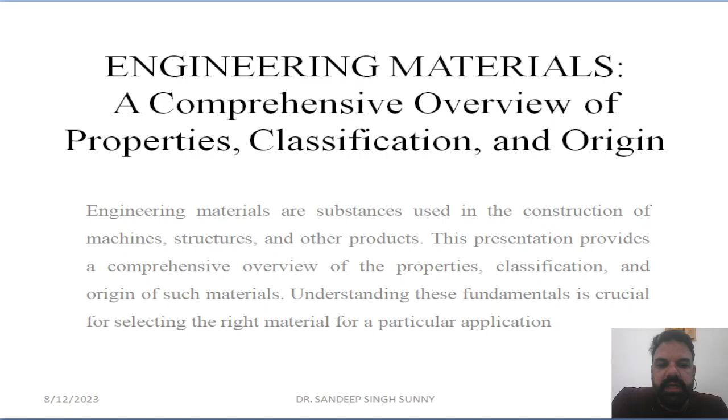So the presentation provides a comprehensive overview of the properties, classification, and origin of such materials. Understanding these fundamentals is very crucial, particularly for mechanical engineers, but I must say for all engineers, whosoever is related with industries or manufacturing, for the selection of the right material for a particular application. So here we have got the introduction.

The physical, mechanical, and chemical properties of engineering materials determine their suitability for different applications. It is obvious that if we know the physical, mechanical, or chemical properties of engineering materials, then only we will be more confident to apply that particular material in an appropriate way. So what are physical properties, mechanical properties, and chemical properties? We will discuss this in the further slides.

The first one is physical properties, which include density. Density, as we all know, is basically the mass per unit volume. Similarly, melting point and thermal conductivity. Such properties come under the section of physical properties of engineering materials.

Then we have got the mechanical properties, which include strength. We all know the strength aspect, as we typically have a dedicated subject related to this property, which is strength of materials in the field of mechanical engineering. The second property is toughness, and the third one, just for the sake of example, is hardness. Basically, hardness is nothing but the property of the material to resist penetration.

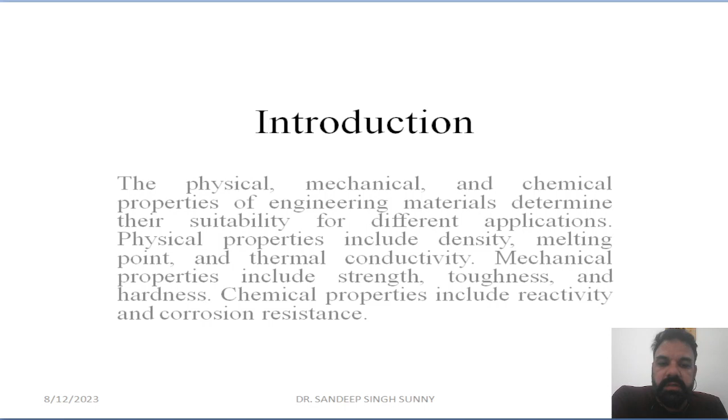So the other one is chemical property. Now the chemical properties may include reactivity, corrosion resistance, and such kind of things.

So in the next slide, what we can see here is the classification of engineering materials. The engineering materials can be classified into metals, polymers, ceramics, and composites.

Now, what are metals? We are already aware about it. Now, what are polymers? Polymers are nothing but the types of plastics. So in the third example, the third type classification may be ceramics.

We all are aware of these things. Ceramics are nothing but the tiles which we use in our domestic use, and it may be wash basins, it may be toilet seats. So all those things are basically manufactured from ceramics, and we do have composites as well.

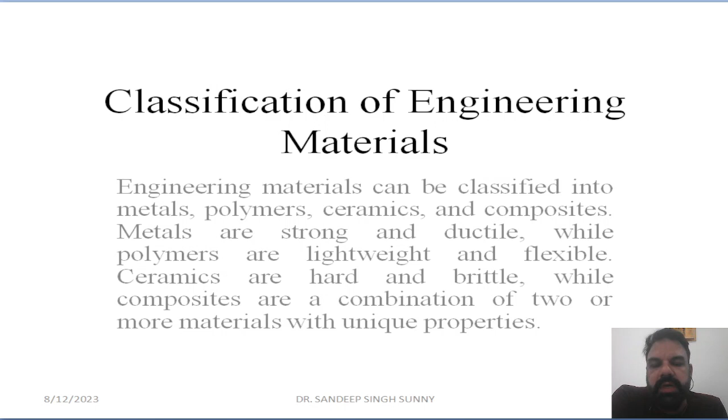So composite materials are basically nothing but the mixture of these things. Metals are strong and ductile, while polymers are lightweight and flexible. Similarly, ceramics are hard and brittle, while composites are a combination of two or more materials with unique properties. So if we want flexibility and hardness both, we can mix two materials, and that becomes a composite material.

So further moving on in the classification of materials. In the section of metals, we have got ferrous metals and non-ferrous metals. Similarly, in the section of polymers, we have got thermoplastics and thermosetting plastics.

The switchboards which we are using in our household devices, and the other plastics which we are using in the car's interior - all those things are made up of polymers. So basically they might be from thermoplastics or thermosetting plastics.

So the third one is ceramics and composites, as we have already discussed about it. Now, coming to the next, mechanical properties.

Let's discuss something much more in detail about these properties. In mechanical properties we have got strength. Now strength is basically nothing but the ability to resist rupture, to resist failure. So it is basically the property where the material can withstand particular forces without getting failure.

So hardness, as we have already discussed, is nothing but the ability to resist penetration. Toughness is basically to withstand external forces - it is the ability to withstand the deformation caused by those forces which are making some kind of deformation in the material.

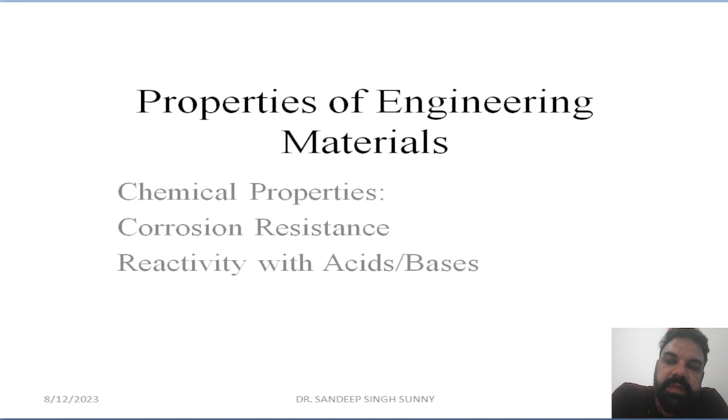So we have got the testing and characterization of materials as well. Whenever we make a finalized product in this particular area, we use testing of materials, and we have got various types of testing here in the field of mechanical engineering or manufacturing engineering.

The very first testing is mechanical testing. Then we have got tensile testing, compression testing, hardness testing, and non-destructive testing.

Non-destructive testing means that we don't destroy the product which we are testing. So basically, in non-destructive type of testing, we generally don't destroy the product. Ultrasonic testing is used whenever we want to check the voids in between the metals or any kind of plates.

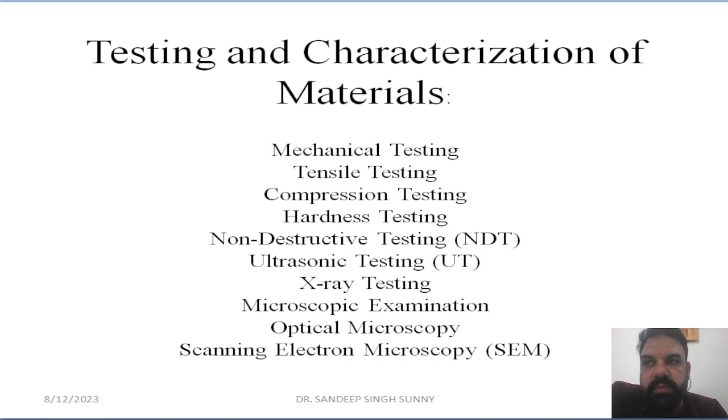Similarly, we have got X-ray testing, microscopic examinations, optical microscopy, and scanning electron microscopy. This is most common among PhD students of mechanical engineering. Scanning electron microscopy is a very common kind of testing in the field of mechanical engineering. So here we have got the common engineering materials and their applications.

In ceramics we have got alumina, silicon carbide. Alumina is basically a polishing agent. Whenever we polish some metal, or polish diamond or something like that, we use alumina as a polishing agent. Similarly, we have got composites, where we have got carbon fiber reinforced polymers, glass fiber reinforced polymers, something like that.

Material selection in engineering design - what are the factors that influence material selection in mechanical engineering. It must be based on mechanical requirements, and it must be based on environmental conditions.

Definitely, cost is a major aspect we will consider in this area. Then we have got availability. Then we have got manufacturing process - what kind of manufacturing process we can use to make our final finished product.

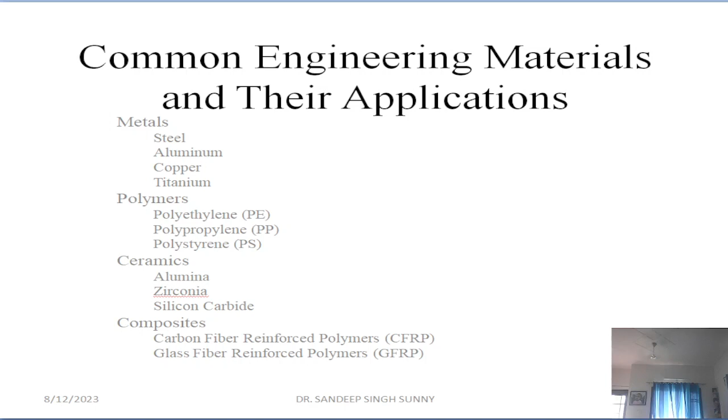In such a way, we have several varieties of engineering materials. Now coming to this section: what factors actually influence material selection? We will see the factors that actually influence the selection of the material.

The first one is basically the mechanical requirement—what kind of requirements we have in the mechanical field. Then it may be the environmental condition, under which environmental condition we are using this particular material.

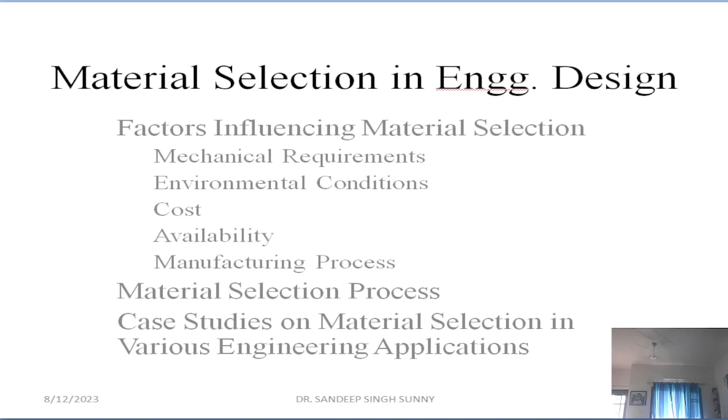Now, talking about the advancements and future trends in engineering materials, nanomaterials are the future scope of this particular section of mechanical engineering. Then we have got biomaterials, and then we have got smart materials.

Smart materials include materials which may include the combination of nickel and titanium. So the combination of these two different metal elements will exhibit a new form of material, and it is generally known as nitinol. Nitinol is a material which has got shape memory, so it can memorize the shape.

Definitely, if we go further, we can see that it is nothing but the transformation from one phase to another - transformation of austenite to martensite or martensite to austenite. So it will be a two-way transformation for this particular material, and that comes under smart materials.

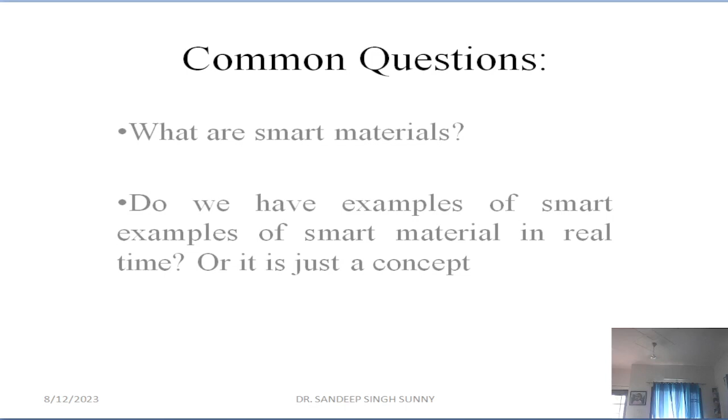Do we have examples of smart materials in real time? Yes, we do. As I told you, nitinol is the very famous or well-known example for this particular material. Nitinol is an example of smart material. Another way to look at it: smart materials are materials that can change their property in response to external stimuli such as temperature, light, pressure, electrical or magnetic fields, or pH values, etc. These materials have unique characteristics that make them highly useful in various engineering and technological applications.

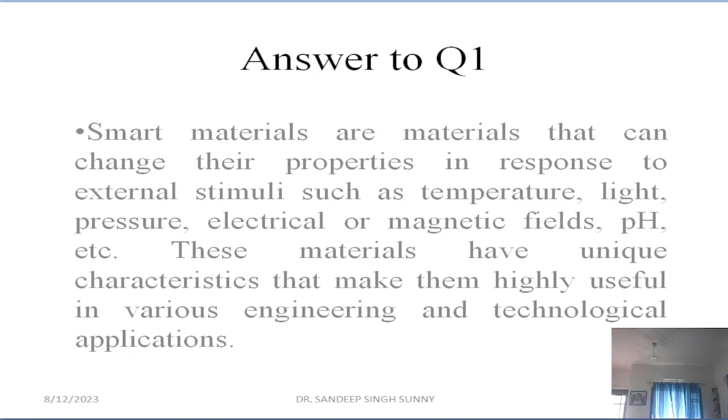Another example, as I told you, are shape memory alloys. Shape memory alloys are metallic materials that can return to their original shape after being deformed, when subjected to a change in temperature or stress. So one common example is nitinol, which is a nickel and titanium alloy.

So in short, let me do a quick revision of what we have done till now. Under this quick revision, I will discuss with you, the students, material science. We just talked about material science, and material science is nothing but investigating a relationship that exists between the structure and properties of material.

Another definition can be taken as, on the basis of this structure-properties correlation, designing or engineering the structure of the material to produce a predetermined set of properties. So we can change the material properties as per our requirement in this particular science. Practically, it is possible to change a particular set of material to our desired combination, or our desired set of properties.

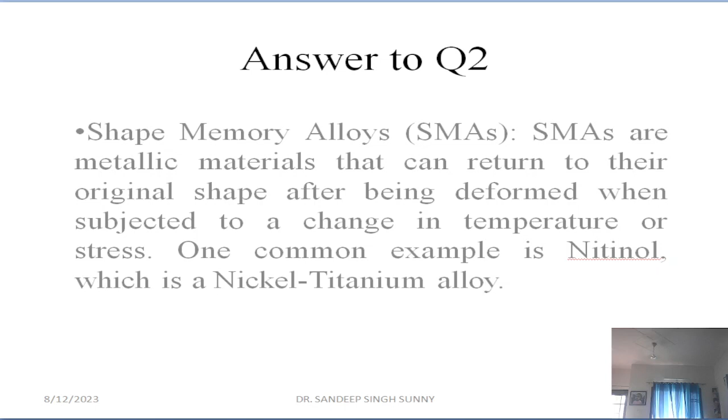So I think these are the things that we need to know for the basics of this particular topic, which is engineering materials. It is a small effort to make a general discussion, to make this lecture possibly understandable for the engineering students who are new to this particular field. I hope you like this lecture, and you might have learned something from it.